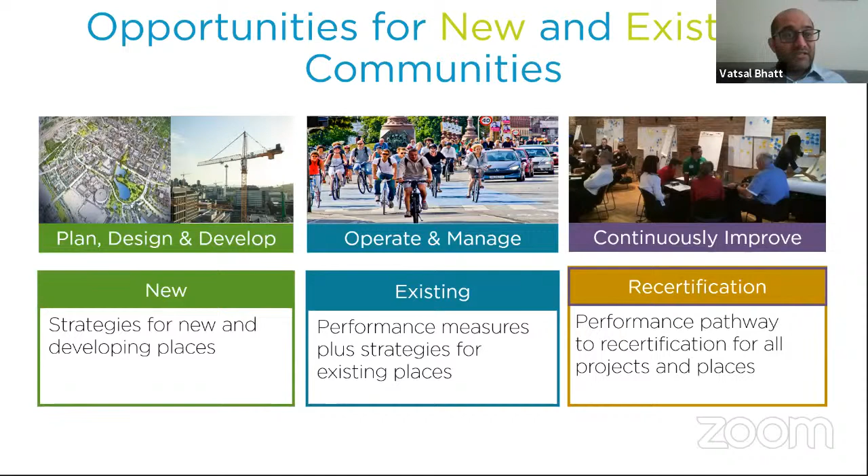We work with them on all these aspects very comprehensively. As you can see, we call this a scorecard, and we also talk about performance as a prerequisite. This is rating system lingo, but in very simple terms, performance is a prerequisite, so as they get started on getting their city or community certified...

Our interest is to really request them to start talking about their performance, take stock of where they are, and then utilize these credits to see whether they want to improve their performance, or if they are already doing some good work, recognize that good work by getting credits on some of these points.

Our ultimate interest is to talk about progressive communities continuously improving their performance, and that is where data comes in handy—where performance becomes an integral discussion. At the same time, when we talk about communities in the planning and designing phase, we talk about communities trying to be very effective.

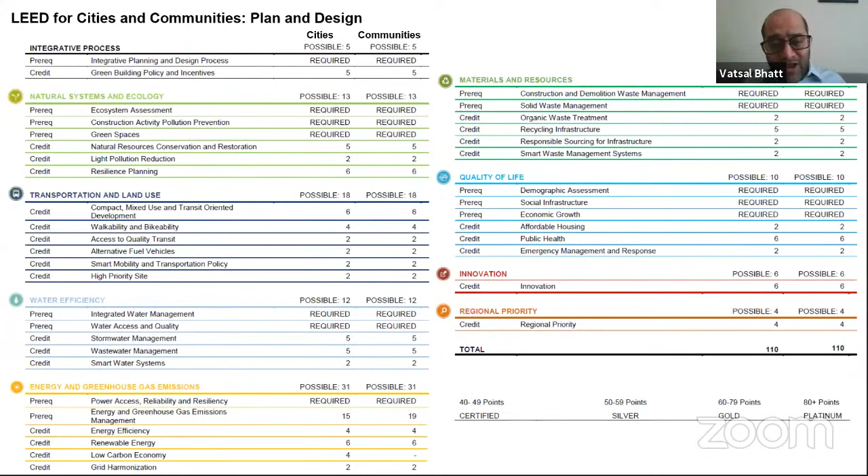Today you will see Monte talking about some of these aspects—what all they are trying to do, how they are trying to create scenarios to go net zero. My colleagues Stefano and Erin on this panel will be talking about 2 communities that are existing and how they are trying to work with it.

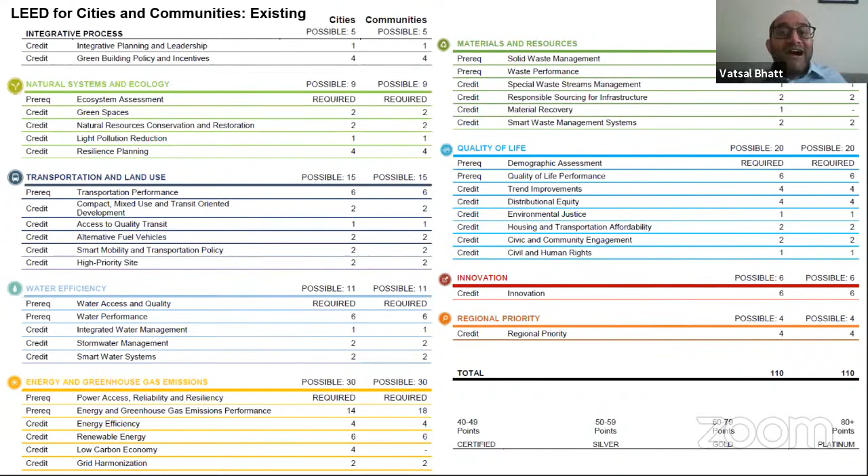Monte and Stefano's communities are mixed-use developments, but Erin's is an airport—an airport as a community, an integral part of an urban fabric. That is what we want to talk about: any community that is an integral part of a larger urban fabric, and what they are trying to do to become an integral part of that. Obviously, all the aspects you see on screen will help them throughout this process. So with that, let me show you a few examples, and the examples you see here are diverse.

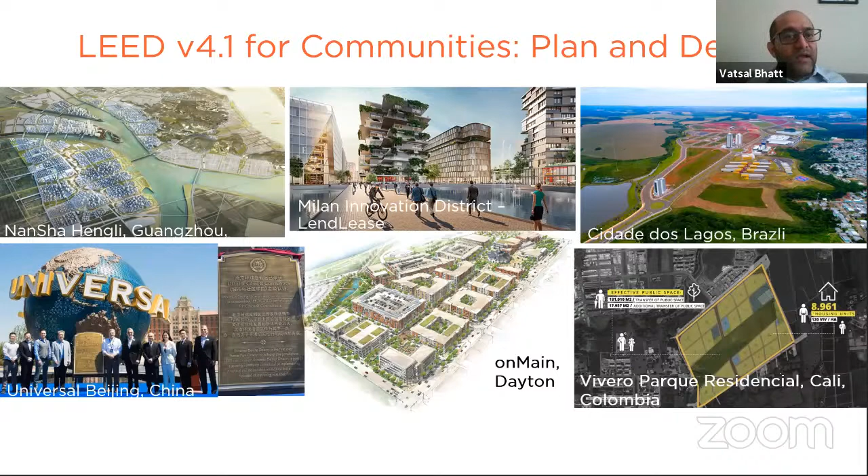Other projects you'll want to see are some existing communities. Developers like Boston Properties and Howard Hughes Corporation are working with us, while financiers like Blackstone and Ivanhoe are working on communities like Stuyvesant Town and Peter Cooper Village in Lower Manhattan, housing 27,000 people, the Golden Triangle Business Improvement District in Washington D.C., the National Historic Landmark Balboa Park in San Diego, and Montclair University.

All are trying to pursue LEED for community with us, and that's a unique aspect I wanted to highlight that you'll see throughout these presentations. Ultimately we have more than 130 projects certified and 245 more projects that we're working with across this rating system globally. Our interest is to showcase the benefit of LEED as a rating system cutting across interiors of buildings to communities, cities, and regions, and talk about carbon neutrality and other aspects across this rating system.

We see that our platforms and rating systems are very well aligned with sustainable development goals or ESG frameworks. ESG frameworks are very useful because these communities we're working with are always seeking funding and finances, and that's where we're trying to align our work with these frameworks.

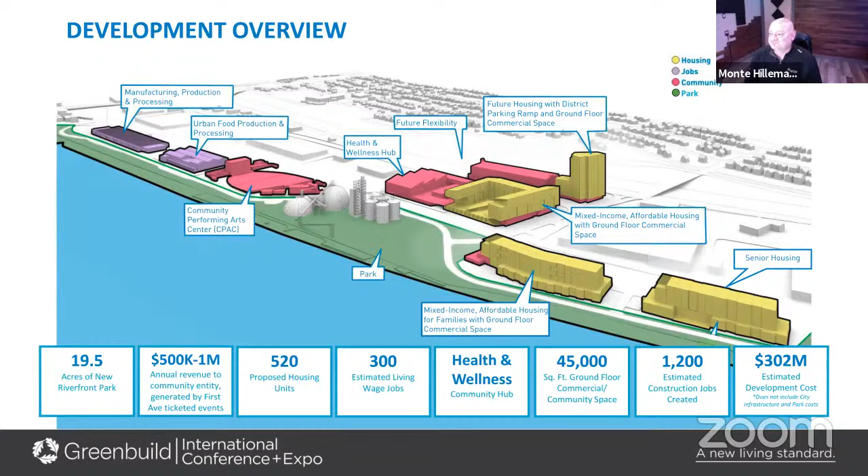The overall master plan for this was just approved a couple weeks ago, although as of this week or last week there is a lawsuit pending. One of the things I wanted to touch on here with Upper Harbor is there was a real push for wealth creation and equitable outcomes coming out of this development.

While the developer is a large commercial real estate developer owned by the Pohlad family that owns the Minnesota Twins baseball team, there was a real push to make sure public ownership of the land itself was integral to this exercise. So you can see there's a lot going on in this diagram.

In my past, I've worked for nonprofit community development corporations. This is estimated to generate between $500,000 and $1 million a year to fund an organization like that. For those types of organizations that do that shoe leather community development work, that is really an irreplaceable opportunity to fund an organization doing that kind of grassroots work.

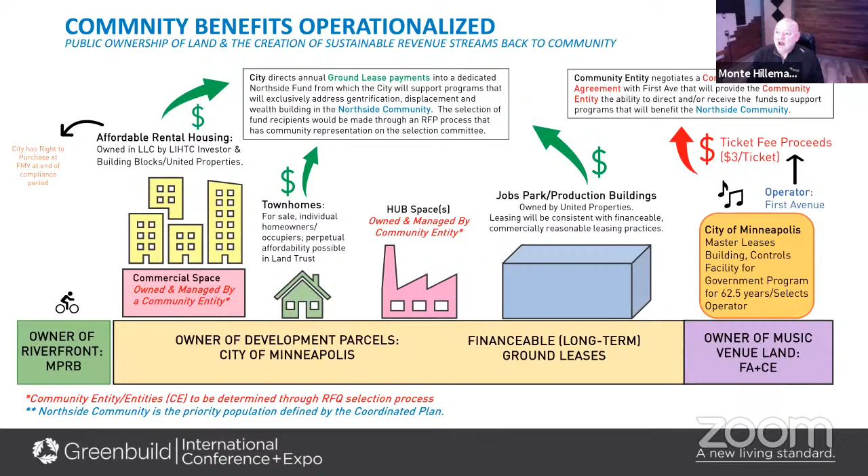I think all too often we have this myopic view of these big development projects—there's an owner, there's a developer, there's a big contractor. But looked at through that granular lens, there's an amazing amount of work in the supply chain for development that could come from local and targeted vendors. This is something Upper Harbor and the development team is pursuing very intentionally, advertising these scopes within the local community as the development gets going.

Moving on to Hillcrest. We've done a bit more of the energy work and carbon work at Hillcrest, so I want to dive in here.

It is a golf course, created in the 1920s, largely to serve the city's Jewish community who was not allowed to golf at other courses. It's a rather suburban location, on the very edge of the city of St. Paul. If you cross the street to the east, you're in a suburb.

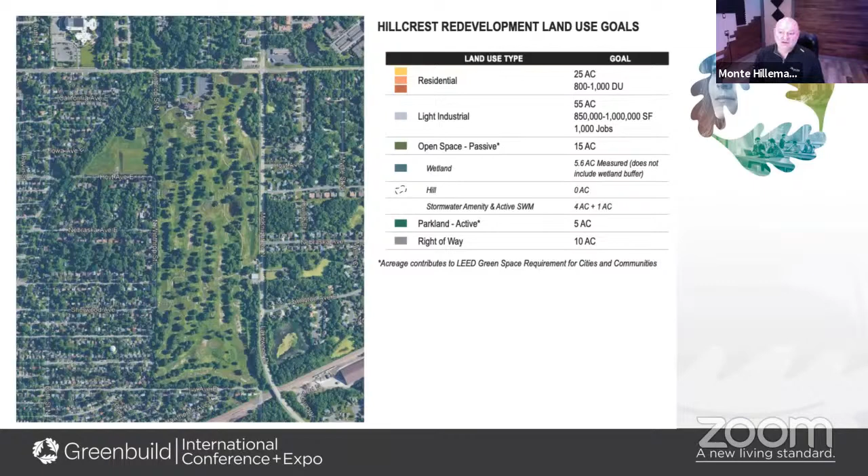We are in agreement with our partners at the city that the site can absorb 1,000 jobs in about 1 million square feet of light industrial product, our specialty, about 1,000 housing units, including affordable housing with a drive toward permanently and deeply affordable housing, plus wetlands, parks, open space, trails, and other amenities, largely medium density residential and light industrial development.

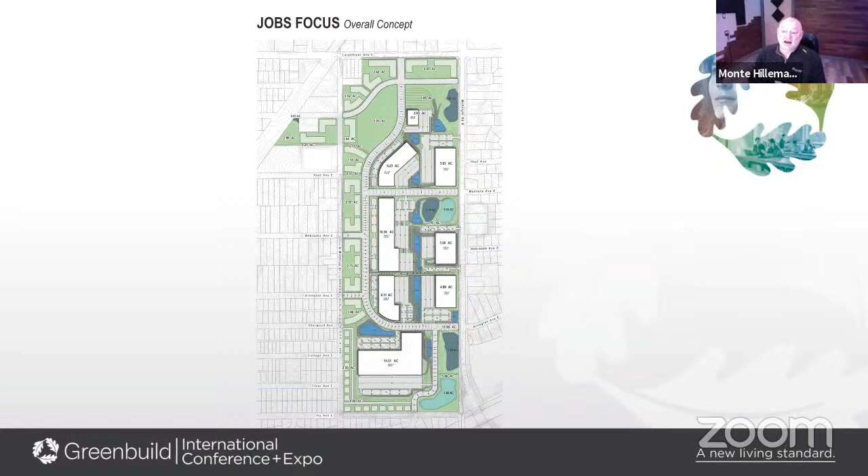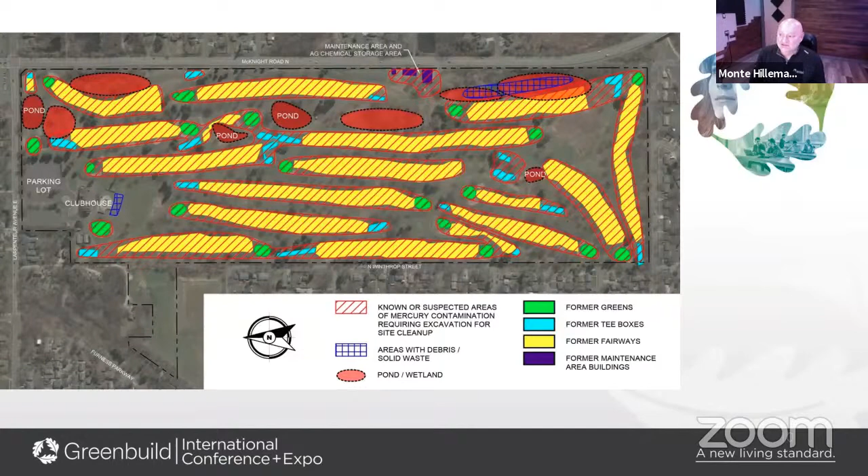And we're going to put a price tag on it, and figure out how to finance it. And we're on about step number 4.

We believe, and have a game plan, figuring out the financing plan for Hillcrest to be net zero carbon, net zero energy for buildings, transportation, and infrastructure.

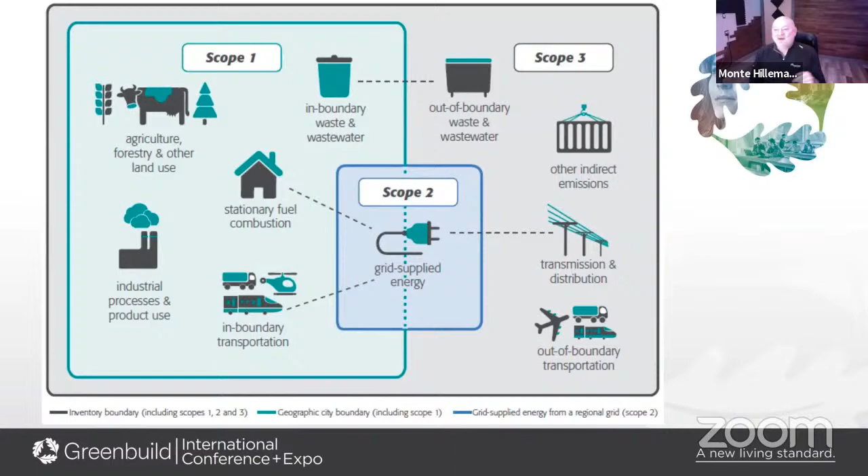This is part of the analysis that is required under the greenhouse gas emissions credit. There's a prerequisite that we meet in Minneapolis, St. Paul, just by the basis of where we are at with our grid and our energy systems today.

So we meet the prerequisite of about 9 tons per capita. The greenhouse gas credit really looks at all of this in terms of tons per capita. If we did what we would normally do in a Port Authority development, we would get down to 4.4, which would get us 10 points in that greenhouse gas credit.

Bundle 1 here deploys about 12 to 14 megawatts of solar on those industrial roofs. It requires everybody to build buildings that are 80 or 90% more efficient than what you would find in the marketplace. We deploy a district energy aquifer thermal energy storage system, I'll show you in a second, and we do a bunch of EV charging and rideshare work.

Bundle 2 is more aggressive. I don't know if we can get there in the marketplace. Bundle 1, we think we can. We're at 15 of 19 points to net zero.

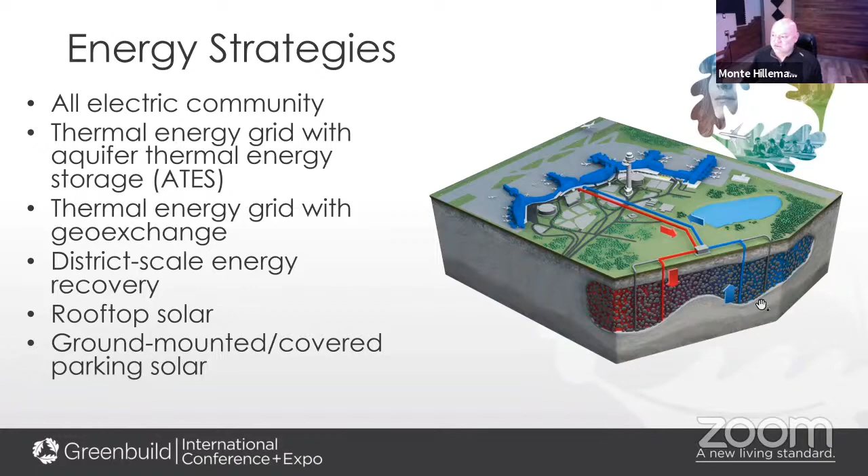This is a new one. I don't think my colleagues have seen this yet. We are to the point now where we are calculating the rooftop solar that will power distributed heat pump equipment at the building locations. So we will use excess PV on the roof to power the heat pump equipment for the entire district system, and each building will have its own heat pump equipment required to utilize that thermal energy.

It's about a $36 million system, and we are just now approaching the state of Minnesota to assist with that. We are a PACE lender. We believe the building owners will PACE finance the equipment on the building side, and we or someone will issue bonds for the remainder. We do own and operate a district energy utility already and issue bonds for that on a regular basis, so not something new to us. Powering it with solar, that's the new trick.

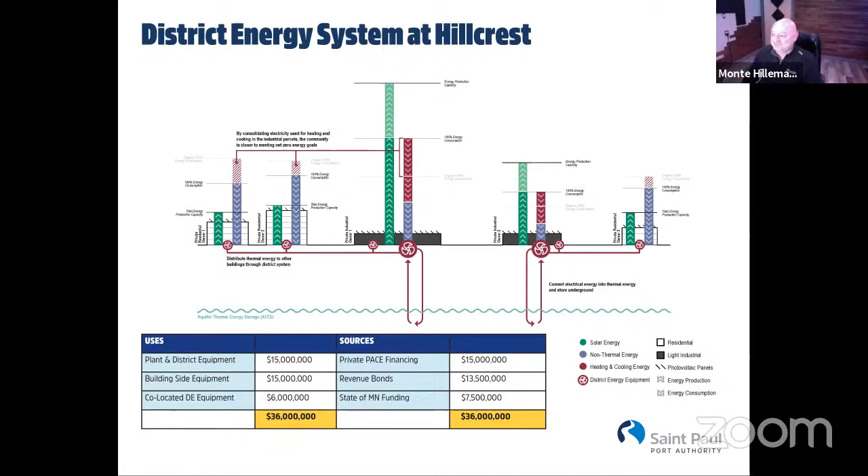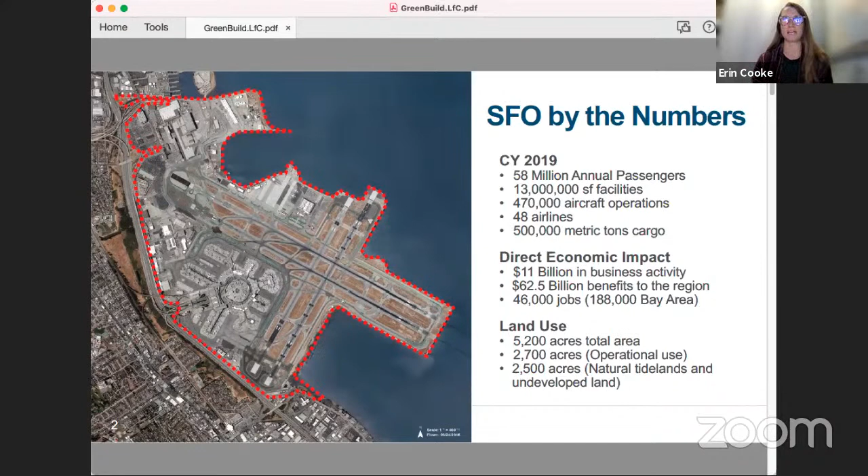I want to also mention that our airport is an enterprise department of the City and County of San Francisco, so we always strive to be on the leading edge of airport and environmental, social and sustainability initiatives while continuing to maintain and manage an efficient business. All of these goals for us really stand today as we're working to deliver our strategic plan, climate and social equity plans, capital plan, and now racial equity plan, all under a new recovery framework.

Sustainability really for us always continues to be foundational across our operations, and we align our goals with that of our industry association, the Airports Council International, and among leaders that tasked SFO with achieving a new moonshot in 2015 that we codified in our strategic plan to achieve zero. So zero net energy, zero carbon and waste.

We've made a lot of headway towards achieving those objectives, but have narrowed our focus in the last 3 years towards a new pathway towards recovery and resilience. Shown on this slide is our roadmap to accomplish these goals, as well as the goals set by our city and county of 0, 50, 100 Roots, so zero waste to landfill, 50% of all trips by clean transportation, 100% renewable energy serving our campus, and Roots focusing on ecosystems and ecosystem services, trees, native gardens, and composts.

It's really important for us to note that these goals set for the airport, our facilities, and our transportation systems do not just focus on those under our direct operational control. We prioritize ambitions that achieve zero to support our tenants in accomplishing these aims as well. So for us that includes our airlines, concessionaires, fixed-based operators that are all essential partners in achieving energy and waste reductions and key emissions mitigations across our supply chain, as they represent 99% of the emissions that arise at our airport, similarly to every airport in which they operate.

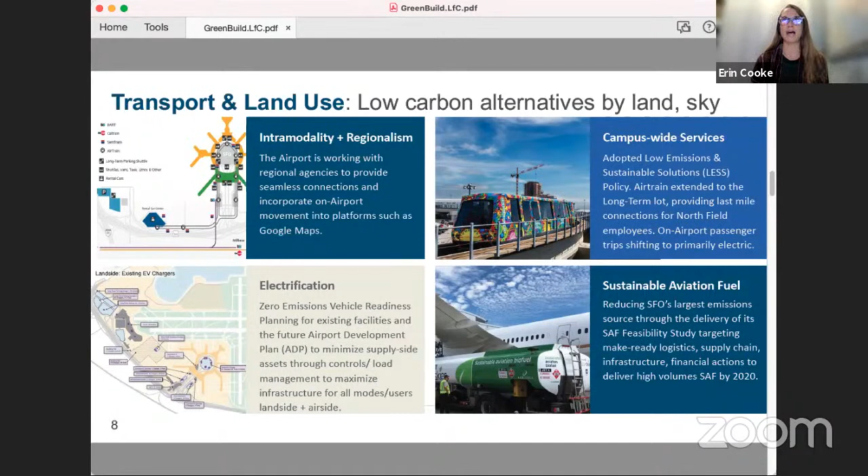And we continue to encourage all of our airlines, 70% of which already have commitments to uplift sustainable aviation fuel from SFO, to expand those active deliveries, which now come from 2 producers, one in Southern California and one via pipeline over the rack that's imported in.

On to zero waste, which has a nexus when we start looking at consumption-based emissions. We are working on a very challenging pursuit with 180 concessionaires and 48 airlines on our campus to streamline the materials they're bringing on campus, focusing upstream to ban the sale of plastic beverage containers, expanded this year to include all bottles, and to require they use healthy, third-party certified compostable products for all foodware and foodware accessories.

Beyond these in-terminal concessionaires and retail vendors, we're also focusing on zero waste, including embodied carbon across our building projects, through high diversion of 90% C&D, but also on material sourcing that prioritizes low carbon, locally sourced steel and carbon sequestering concrete.

So shifting to the quality of life that I described at the beginning as the nexus of the climate work we've been doing, as building owners and an airport who feels a strong sense of responsibility to safeguard our employees and the passengers traveling through our airports.

We really have used WELL, and it fits well as a template on how we can go further, moving beyond an airport known for yoga rooms and banning plastic water bottles to one using evidence-based standards like air, water, nourishment, thermal comfort, sound, materials, and community to prioritize outcomes we want to bring to our employees and passengers, such as reduced absenteeism and social equity across vulnerable populations.

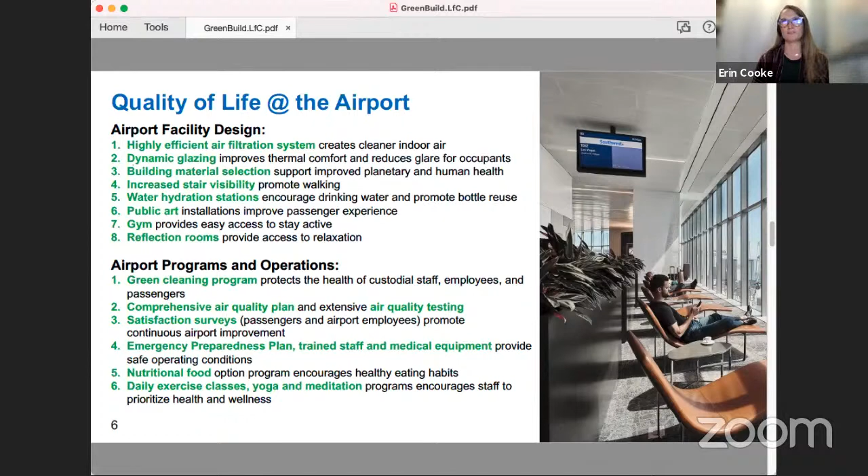Beyond that, we are also really focusing on building a work culture grounded in our core values, and a workforce that is as diverse and inclusive as our region and the millions of travelers that we serve.

So to support our workforce, in 2020 SFO formed a racial equity committee to look at our programs, policies, and opportunities to advance racial equity. This group completed a phase 1 racial equity action plan in December 2020, which assesses current conditions, identifies necessary resources, and holds ourselves accountable to measure these goals and commitments over time.

And these actions in our plan aim to represent and increase the representation of more diverse populations in our organization, expanding this year to also focus on airport delivery of services.

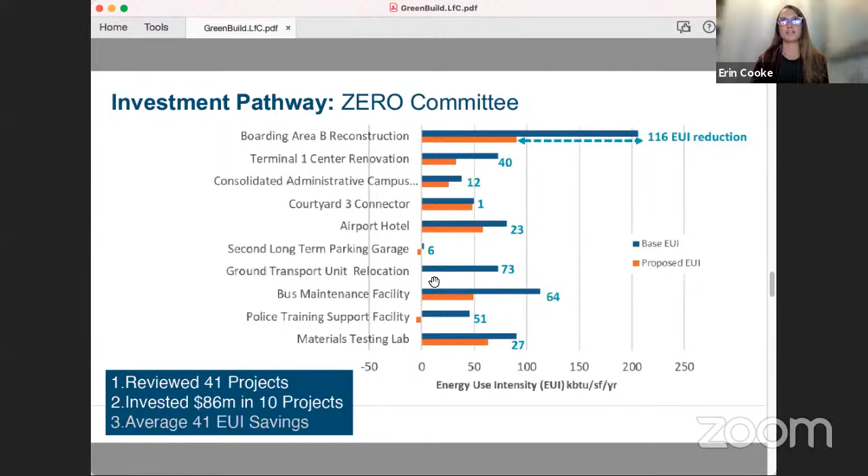These programs for us have always been very much focused on triple bottom line investment. Similar to what Monte showed in his performance outcomes, we have an interdisciplinary committee that has prioritized $86 million in investment to help the airport achieve its objectives and aims. Shown here is the investment we've done to reduce the energy use intensity of our buildings, those activated under our current capital plan are now using one-third the energy of their building predecessors.

We were able to do this by leveraging a triple bottom line cost-benefit analysis tool that allows us to move beyond CapEx and OpEx investments, to quantify and monetize the financial, environmental, and social impacts over the lifetime using a net present value metric.

This is incredibly important, touching back on what Vatsal said at the beginning, as we're preparing our ESG disclosures that will go out to access new capital markets. Being able to use software that shows the total investment of our airport campus, those going to health and wellness measures, and those achieving broader aims, we're finding to be incredibly compelling, both to rating accounting agencies and rating standards boards, which are really guiding the investment opportunities available to us on our campus.

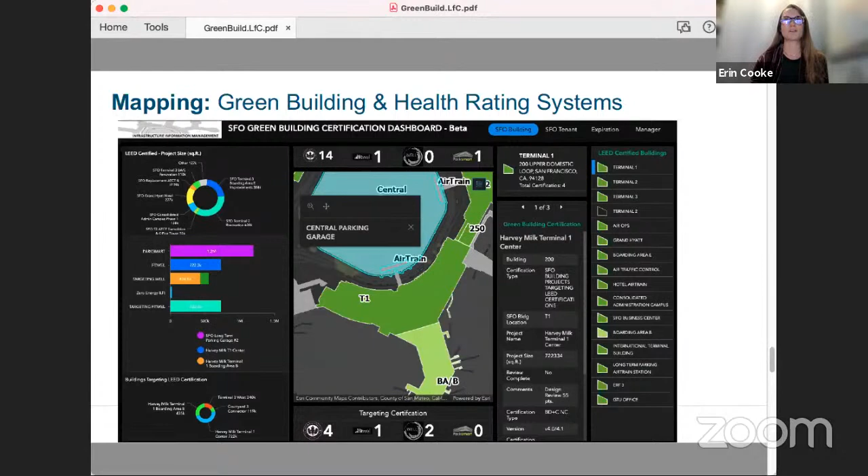So all of these have really just been the tools that have helped us build longevity and advance new third-party rating and certification programs for our campus, and have emboldened the outcomes we've achieved. We want to visualize and show this across airport leadership and our project teams, and roll it out to broader communities using a GIS dashboard that shows certification programs, key outcomes, and key measures achieved on our campus.

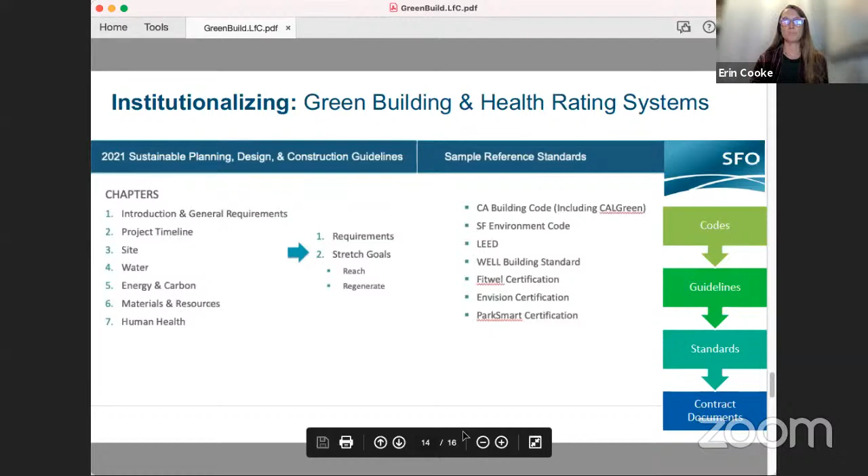We've also worked to codify and institutionalize this within a sustainable planning, design, and construction guideline, so every future project can leverage what we've accomplished over our sustainability journey and embed this going forward, as well as visualize this to our customers.

We think it's important that as you're traveling through SFO, knowing we have a Bay Area community with a strong environmental ethic, we showcase information that aligns with their value system and emphasizes our alignment with well-being, zero waste, and zero net carbon.

So just to wrap up, what was once a moonshot for our campus set on achieving zero has really been the playbook for purpose-driven pandemic response and economic recovery. It's adapted to our new operational environment, but has also inspired and ensured business continuity for our organization and those that surround us. Most importantly, it's grounded in and mission-focused on safeguarding our climate, with the hope that SFO can become a model for airports, campuses, and cities countrywide and beyond.

Thank you so much, Erin. This is amazing, so much good work. I can't stop raving about it. Thank you again for presenting it to us.

Stefano, please talk about your good work. We're always happy to hear more from you.

Thank you, thank you very much. First of all, thank you for inviting me. I'm going to share my screen and present Porta Nuova. Give me a sign that you see the presentation.

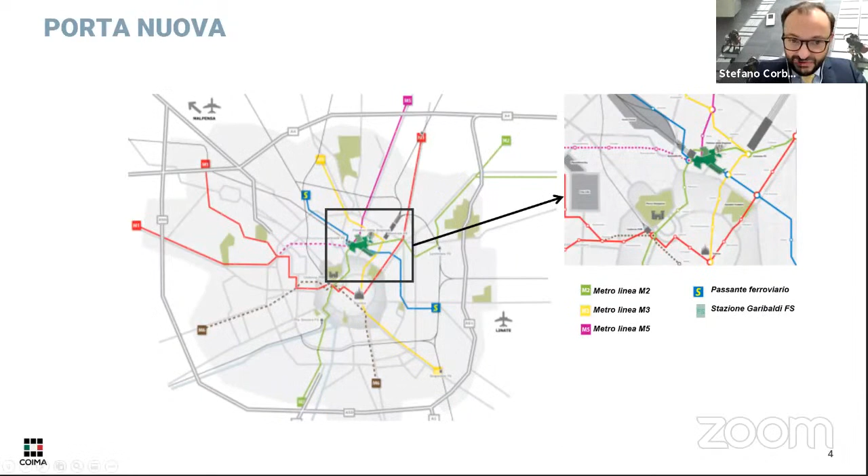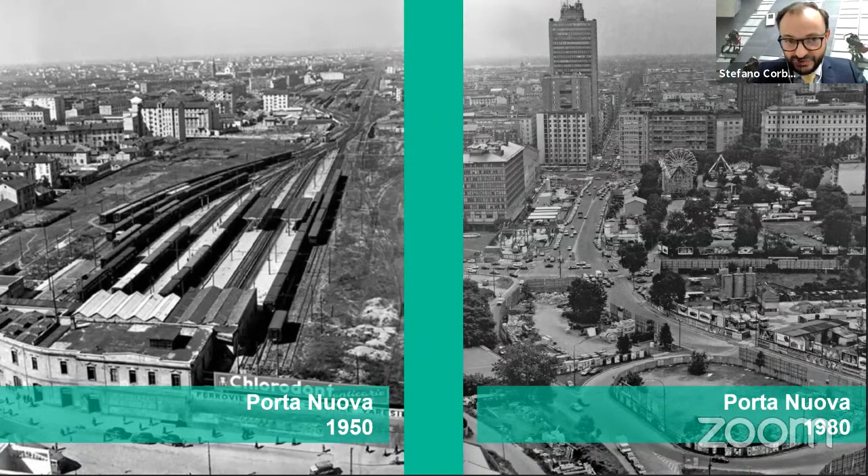It's an area located in Milan, just outside the historic center. Back in the 50s this was a railway yard, and after that it was left behind, basically unused, as the train station was moved elsewhere. The land left behind was then used, as you can see in the 80s, as a leftover space in a chaotic urban fabric. Once the train station moved, the space in front of it was again poorly designed from an urbanistic standpoint, and it stayed that way for decades.

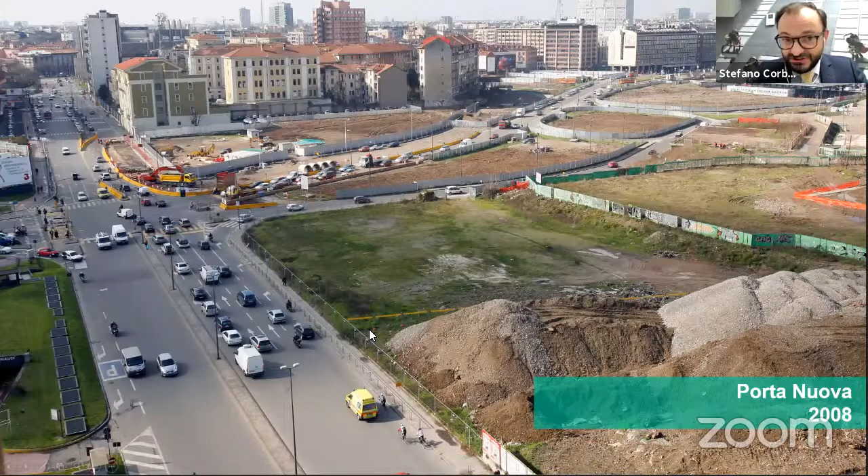That's 2008, just before we started our work. We had a vision: this project would be a mixed-use development with offices, retail, commercial, and cultural buildings - we have a foundation, museums, and so on. But most importantly, it was a project hoping to reconnect the surrounding neighborhoods. Up here is the neighborhood called Isola, which means island, named that because it was pretty much impossible to reach from the city center, since in the middle there was this scattered urban fabric with the former railway.

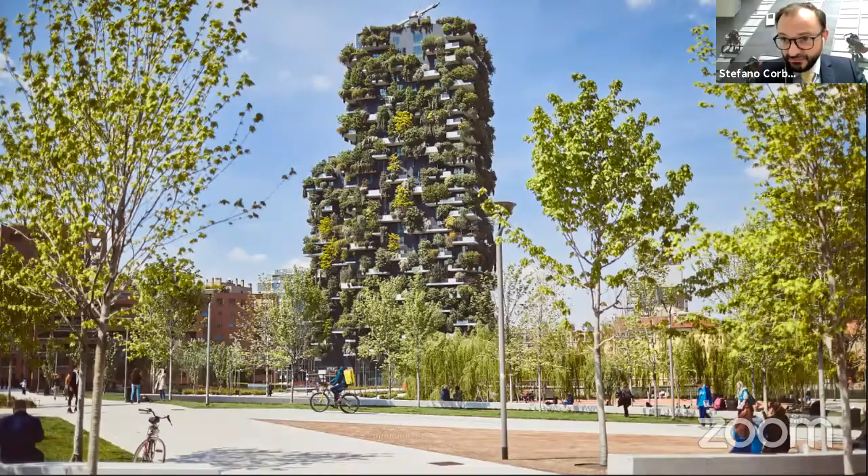So that's today - this is the project today, a photo taken a few months ago. We built the park, we created what was our vision, developed the park and the Bosco Verticale, the famous residential building, which was the first phase of the project. Back in 2008, we were the first developer to introduce LEED certification in the market, and we did it at scale - all buildings LEED certified, the first project of this scale to introduce that certification.

Today, Milan is third in Europe in terms of number of certifications.

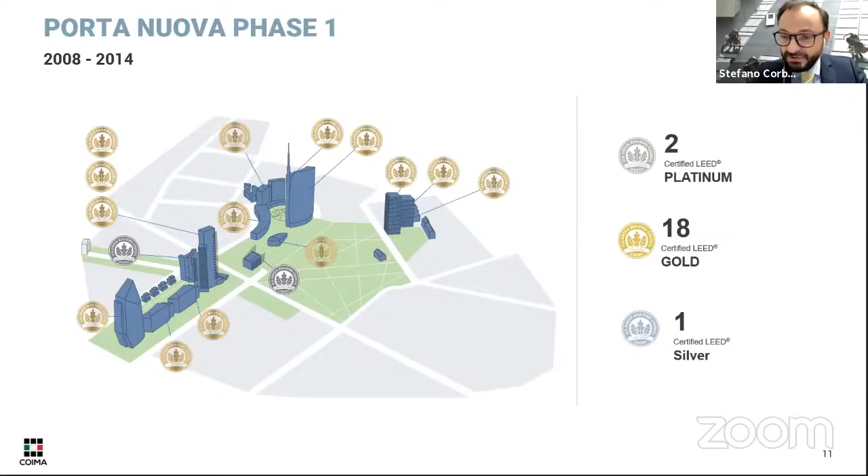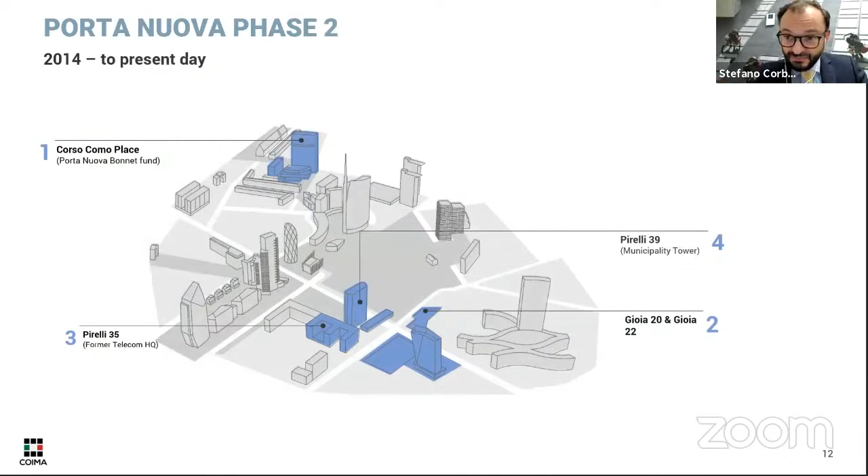There are 300 buildings certified now, and we have pretty much 50 of them, only us, in the city of Milan. That was phase one. Now, from 2014 onwards, we kept expanding the project, adding new pieces.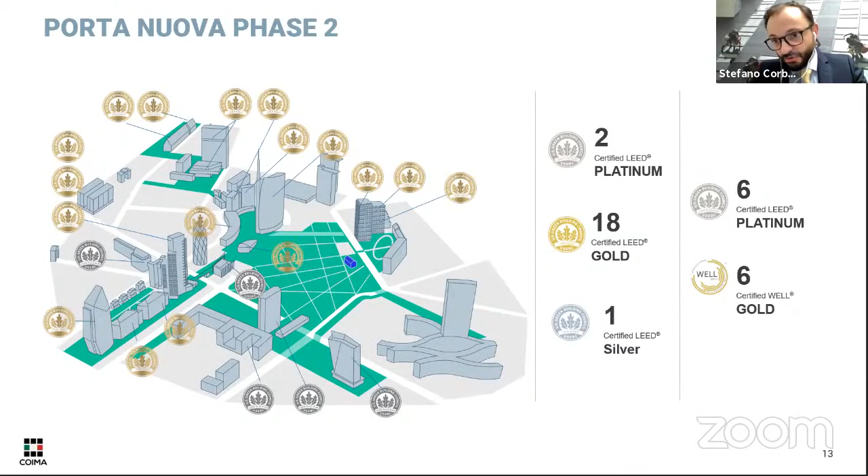The strategy was to expand the quality of the urban fabric all around. The most important thing that kept everything together was the public spaces we developed on behalf of the city of Milan. We developed 200,000 square meters of open space area, some private, some public, and gave some back to the city as a public park. This scheme was stitching together every piece of the building and the neighborhood around it.

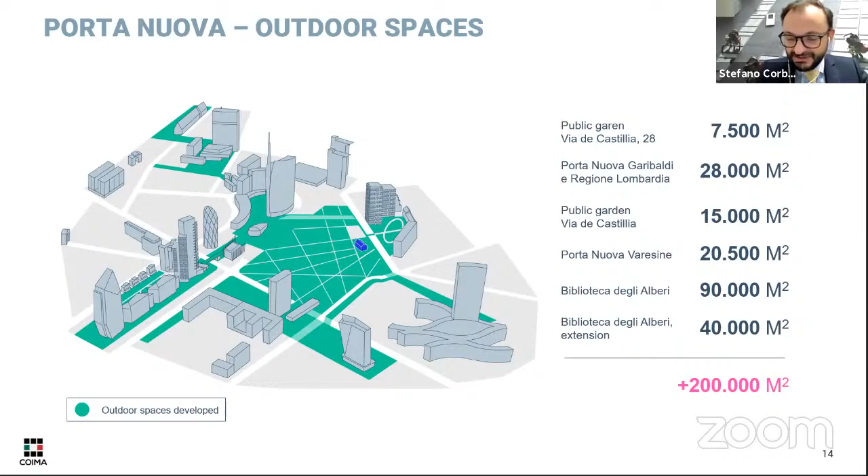So we signed an agreement with the city of Milan to get the management of the public spaces we developed for the city, through a non-profit foundation. We take care of maintenance and security of all public spaces, but most important, we manage them to provide cultural events. Everything that happens in these public spaces is managed by us through the foundation, so we create public events for our tenants, for arts and cultural events.

Now the next step is working on the full digitalization of the neighborhood. We created an app and are working on fully digitalizing the neighborhood. We suddenly realized we were transforming from a traditional real estate operator, which builds hardware, buildings and so on, into a community operator.

So we thought LEED and WELL Community could help us bring everything together from an environmental, health and well-being perspective at community scale. As I said, all the buildings are already LEED certified, and some new buildings we're also certifying for WELL. Then we said, since we manage everything, let's go for LEED for Community, to bring everything together.

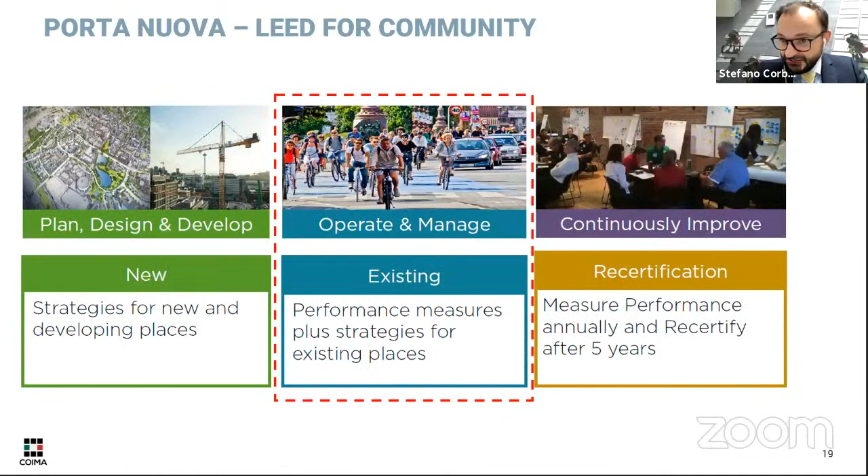We're operating under the existing protocol, and the most important thing about LEED for Community is measurement. It's very important that everything we do, we can measure, compare, and then improve. The topics are very different and very relevant, especially in managing such a large area.

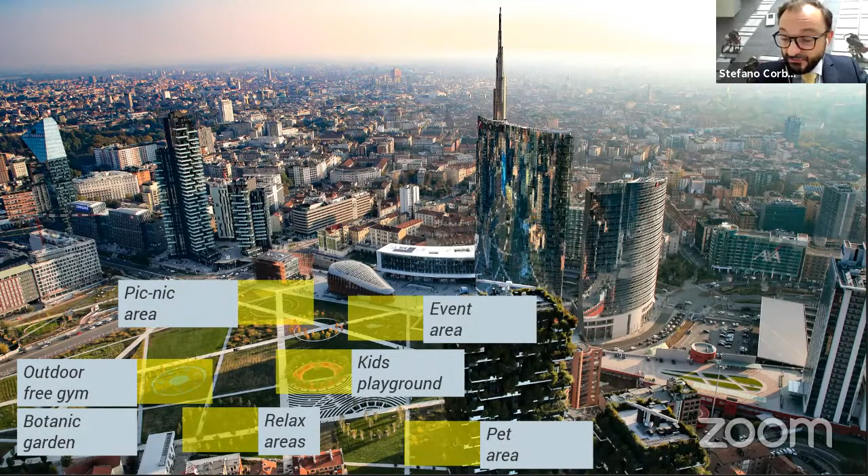An interesting thing we found when we studied LEED for Community was that we already had several thematic areas within the park providing services for the public - kids' playground, outdoor free gym - already embedded in our design. So when we started LEED for Community, we found a lot of things were already embedded in our vision, which was really interesting.

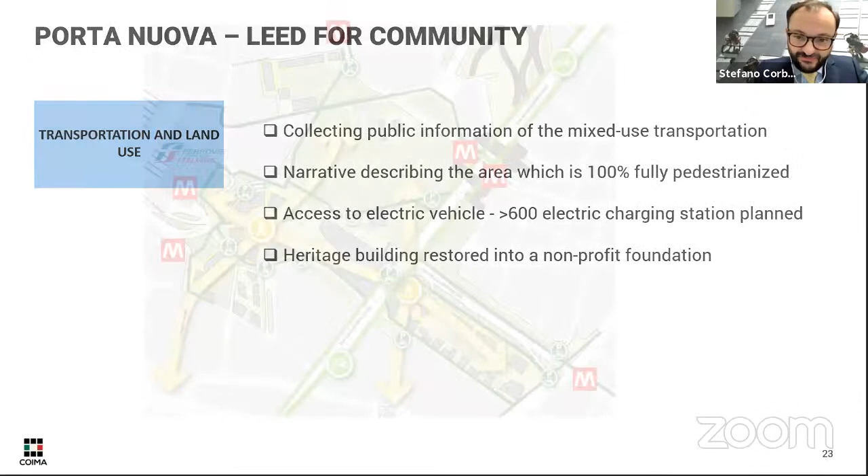Transportation and land use was interesting because the site is now very well connected, with tube stations around. We developed a cycling path, but most important, our scheme was to make the whole area pedestrianized. We lifted up all the public spaces - here there's one of the major traffic roads, but by lifting everything up, the cars are below, and once you're in the piazza above, everything is free of cars and fully pedestrianized, which improved the quality of the area.

Now we're running a program to electrify all the parking stations and parking plots within the basement, to switch from fossil fuel to electrified mobility. Our projection is that in the next four to five years, the number of people owning electric cars will increase dramatically.

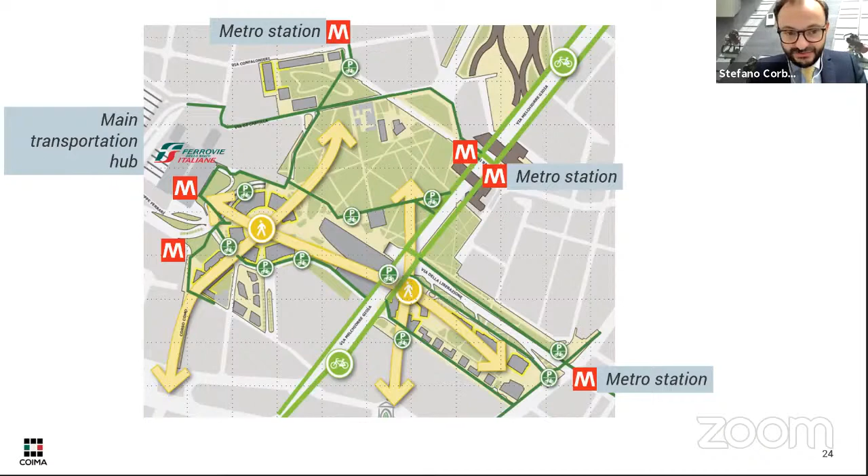Water efficiency is another interesting topic, also related to energy and greenhouse gas emission performance. As Monte showed before, the entire site is equipped with groundwater heat pumps. We have zero use of fossil fuel, either for heating, cooling, or domestic hot water - everything is produced through the heat pump system using geothermal energy. We're lucky because the first aquifer layer in Milan is at 15 degrees Celsius, perfect all year round for the heat pumps, providing the entire energy source for the site without any need for fossil fuel.

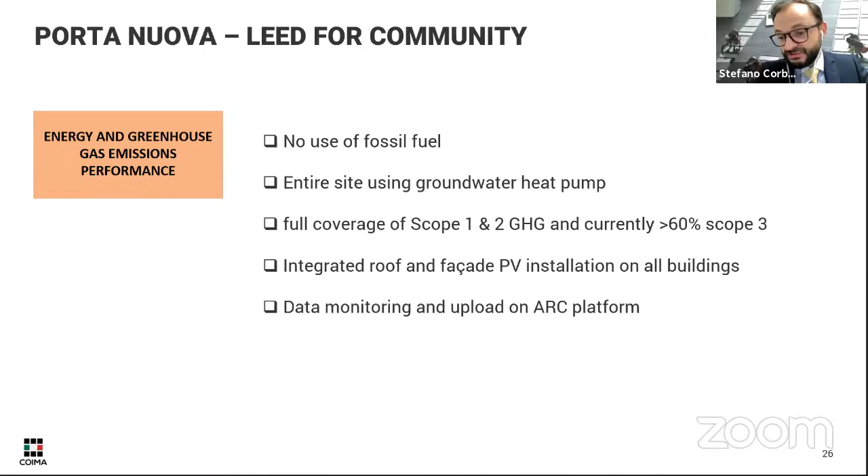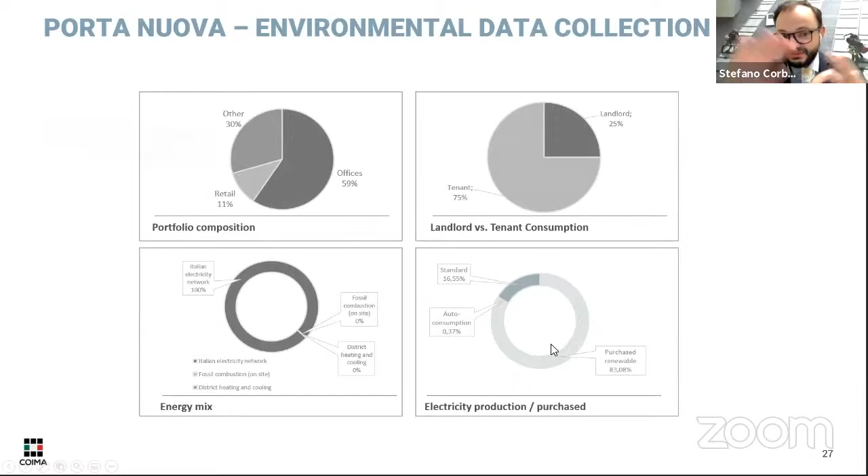We have only our marginal standard electricity part. That, by the way, the entire consumption includes the tenants, not only the landlord. So this is the entire portfolio and the entire performance.

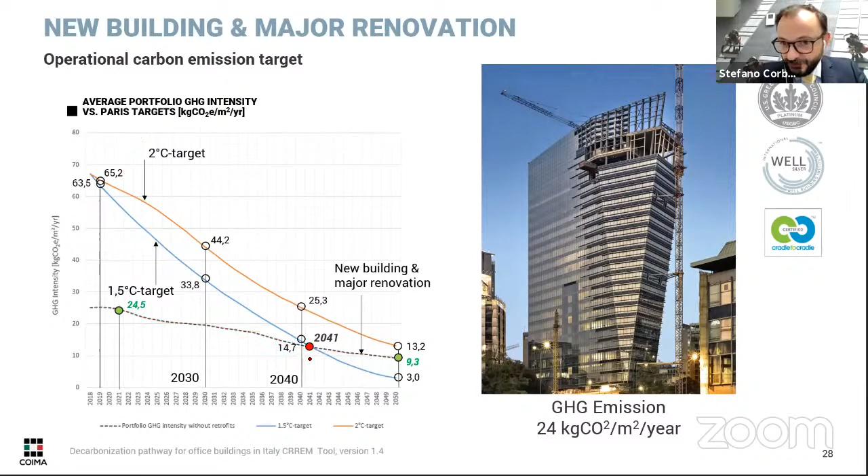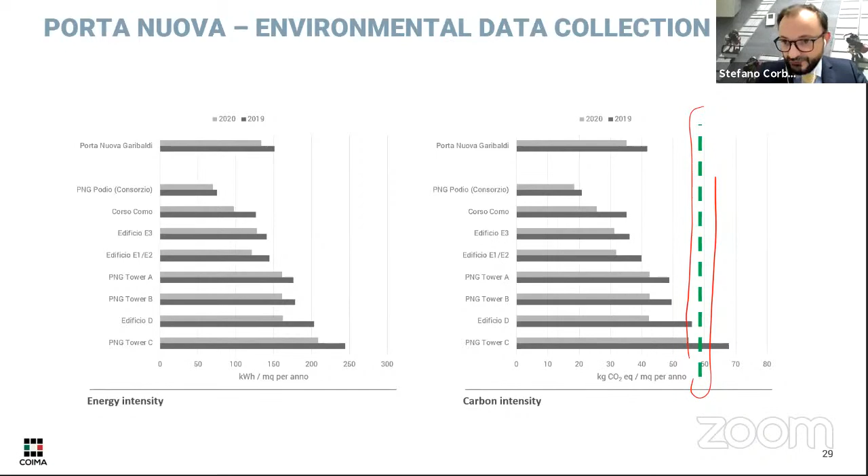And this is the entire portfolio. See, Porta Nuova, currently most of the buildings are below the current carbon emission factor, which is this red line for 2019. Obviously we are planning to implement the decarbonization strategy throughout all buildings and throughout the portfolio to make sure that we will keep below the EU decarbonization pathway.

Material and resources, that was another interesting thing, because as you have seen, we have a lot of buildings. We have 200,000 square meters of public spaces. Waste management and monitoring is a huge topic. Unfortunately, in Italy we have a law where the tax we pay for waste is based on the square meters of the property, not based on the quantity of waste produced. That was one of the key difficulties, because no one is measuring how much waste is produced.

There is a very strict control on the separation of waste, so everyone is pretty good at maintaining paper, glass, and plastic separated with a very high rate of control. But the quantity is not managed by anyone, because there's no incentive, since it's based on square meters. So either you produce 1 ton of waste or half of it, you have the same amount of area and you pay the same amount of taxes. That is one of the tricky parts.

We started to measure the waste because we want to give feedback to the tenants as well. This is not yet completed throughout the portfolio, but it's an effort that is worth doing, because it's helping us and the tenants to manage the waste in a much better way.